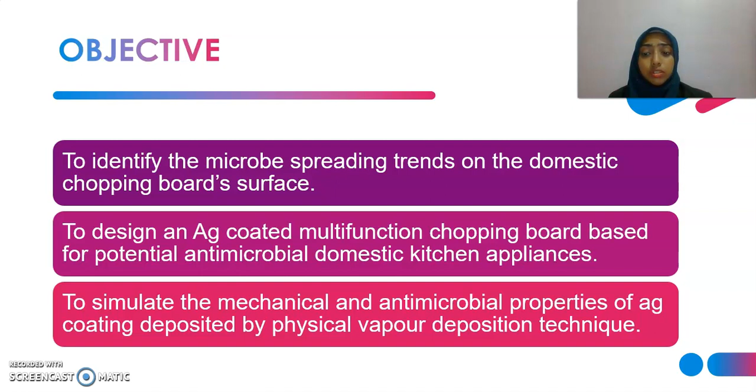Now we move to the objectives. First is to identify the microbe spreading trends on the domestic chopping board surface. Second is to design a silver-coated multifunction chopping board based on potential antimicrobial domestic kitchen appliances. And the last is to simulate the mechanical and antimicrobial properties of silver coating deposition by the physical vapor deposition technique.

This is the plan phase for my project. First is the literature review. Second is the identification of consumer needs, which includes benchmarking, product specification, concept generation, technical drawing, bill of material, and design optimization. Third is the chopping board development and nano silver coating. Fourth is the testing of effectiveness.

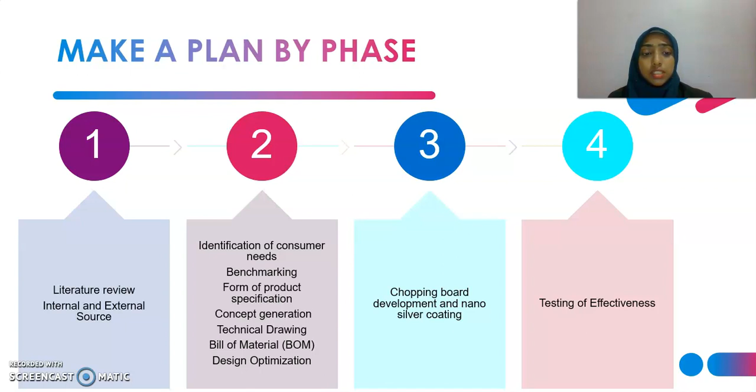Now we continue with usefulness and application. First, a new antibacterial surface for the chopping board was studied because nano silver coating is widely used in the medical field. Second, it stops microbial spreading on the chopping board with the use of nano silver coating. Third, it maintains food hygiene with the application of an antibacterial layer.

Fourth, the silver coating is used not only for antibacterial properties but also comes with long life coating due to its mechanical properties. Fifth, it reduces the use of kitchen appliances such as knife sharpeners and the placement of chopped food such as plates. Then used in domestic kitchen areas. And the last is the customer segmentation, which is housewives and daily domestic users.

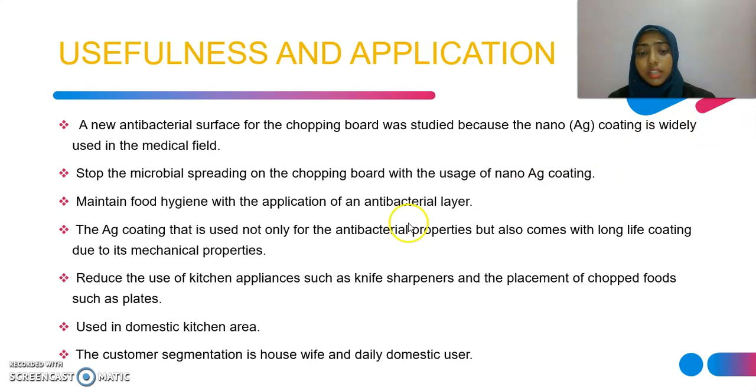Now we proceed to the novelty and inventiveness. Using a bamboo scrimber as the base of the chopping board is well known for its durability. It has a storage compartment that makes the chopping board user friendly. The silver coated chopping board can resist bacterial spreading. It has a drainage tray to stop or avoid microbial spreading in any circumstance.

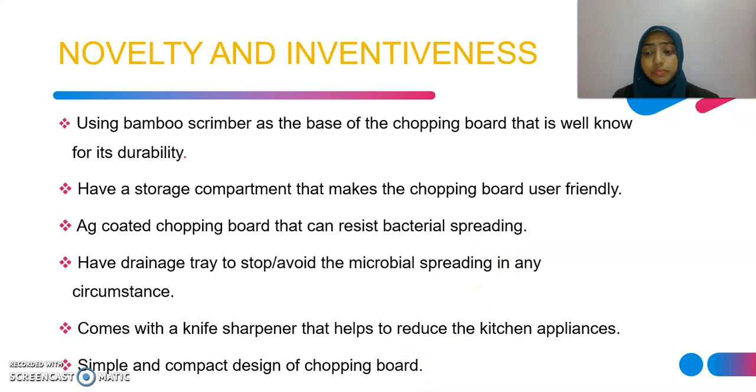It comes with a knife sharpener that helps reduce the number of kitchen appliances needed. It's a simple and compact design chopping board, portable and easy to use.

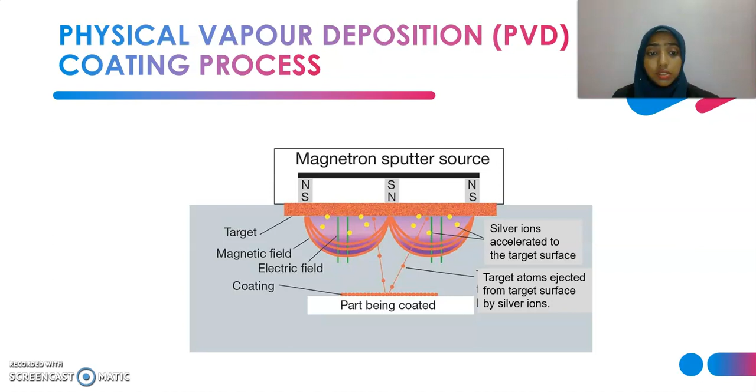Now we proceed to the physical vapor deposition, PVD, coating process. As we can see, the silver ion accelerates to the target surface. Then the target atom is ejected from the target surface by the silver ion, and the ion becomes the coating layer of the part that's been coated. In my project, the part that's been coated is the stainless steel metal.

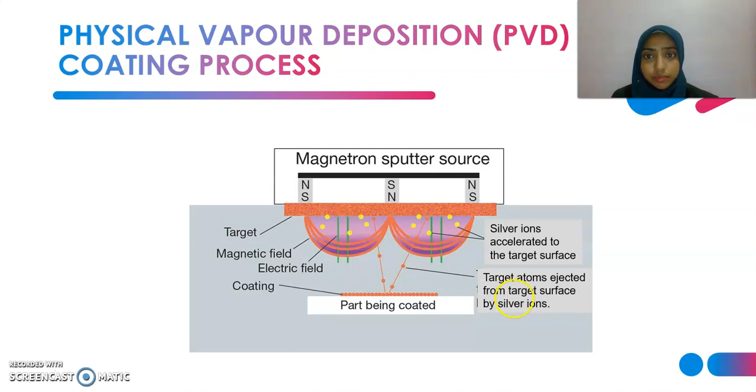This is the antibacterial result. First, as we can see, is the silver coating. Then is the silver cumulative between the water and the medium that is used. And then the antimicrobial activities.

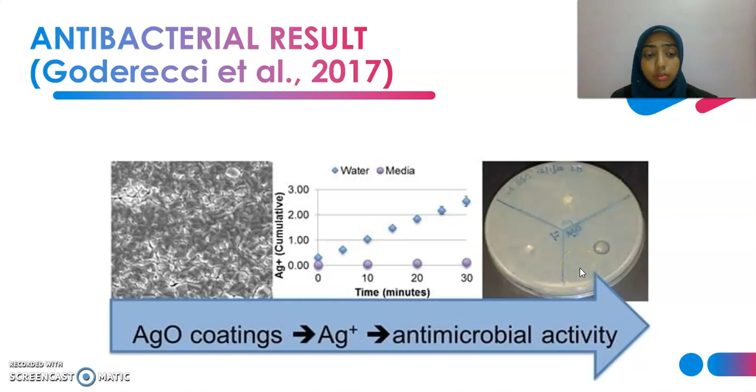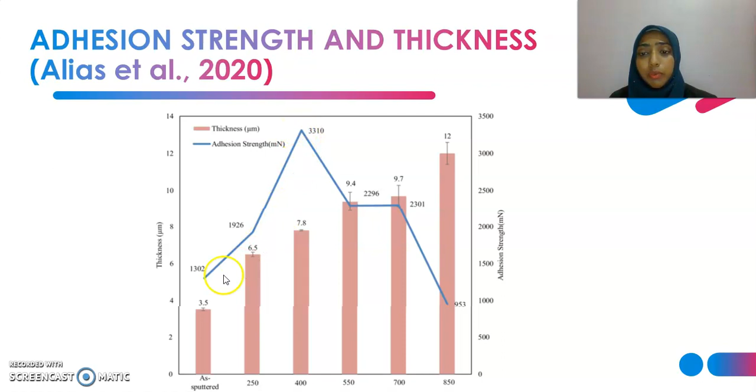Now we proceed with the idea generation. For this project, I have generated three ideas: ideation A, ideation B, and ideation C. As we went through the screening and scoring process and considered the customer needs, it came up that ideation C is the best solution and best design to be used in this project.

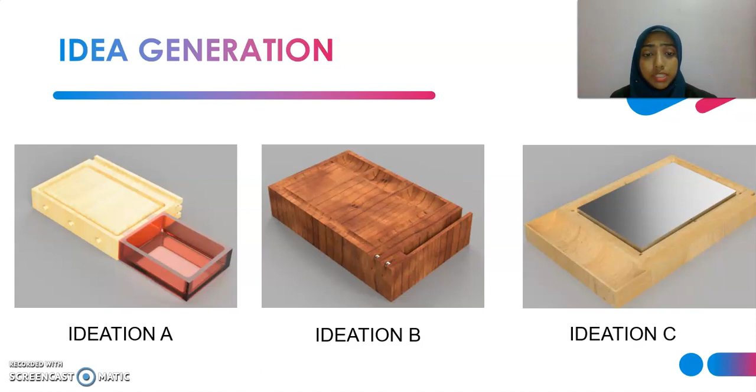The overview of the selected ideation: as we can see here, there is a fluid flow tray, fluid flow channel, storage box, knife sharpener, and stainless steel. The stainless steel is the material used as a layer on the chopping board, and the antibacterial layer is coated on the surface of the stainless steel.

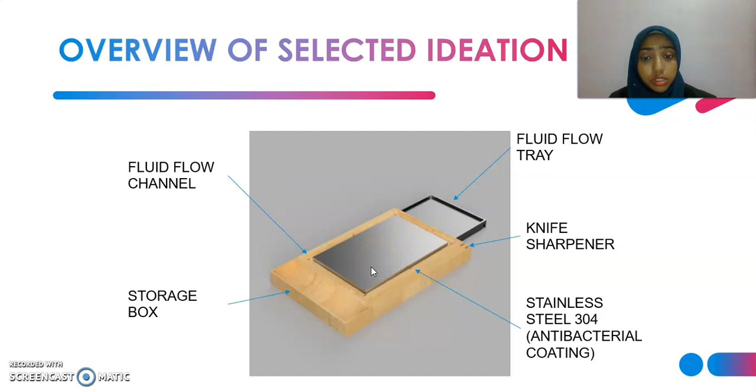For the fluid flow channel, when we cut raw material on the surface, the fluid produced will be channeled to the fluid flow channel and will stay at the fluid flow tray. So the user just has to take out the tray and wash it, which helps avoid microbial spreading on the chopping board. This chopping board is also user friendly because it comes with a storage box.

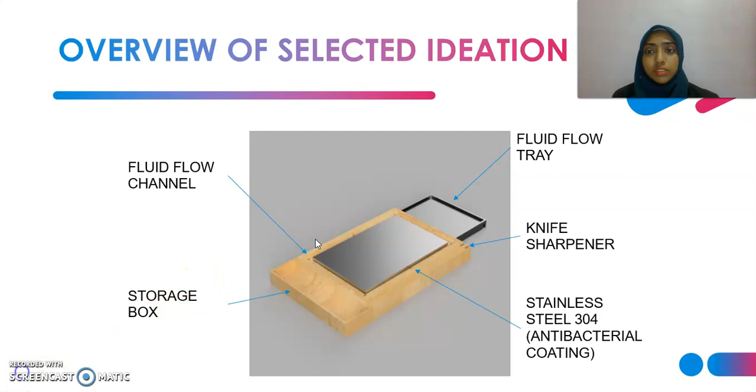Now we proceed with the selected ideation. As we can see here, this is the front view, top view, and isometric view of the selected ideation.

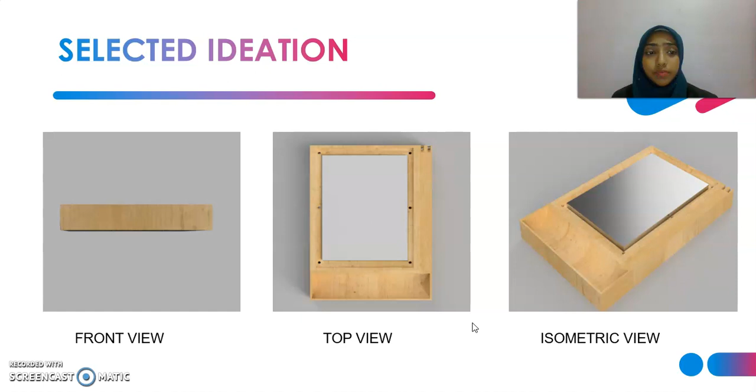This is the product simulation for the chopping board. We start with the safety factor simulation. The maximum load that we can use is 15 Newton, and the displacement is shown here.

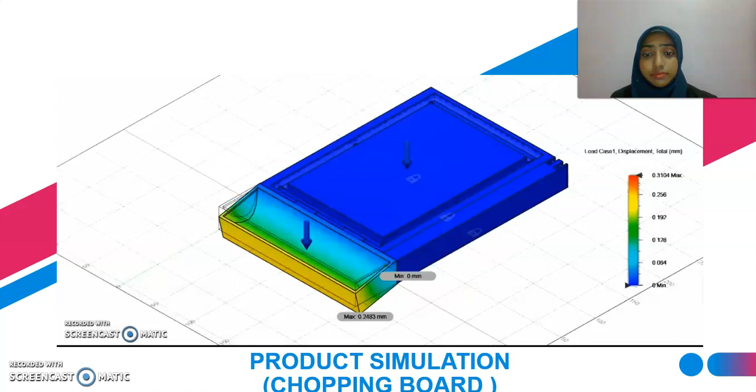Now is the stress simulation. This is for the strain. And this is the reaction force. And lastly, this is the contact pressure simulation.

Now we proceed with the product simulation for the antibacterial sheet. First comes the 10 millimeter thickness, second the 5 millimeter thickness, and the last is the 3 millimeter thickness.

First for the safety factor, second for the stress, third for the strain, next for the displacement, and lastly for the reaction force.

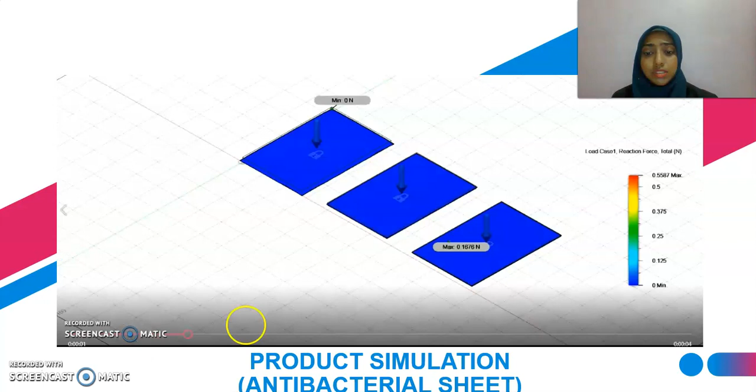Even though the result of the safety factor shows that the 10 millimeter thickness is not safe enough, when we come to application in the chopping board, the 10 millimeter is very good because it can protect the bamboo scramble surface from falling apart or being destroyed.

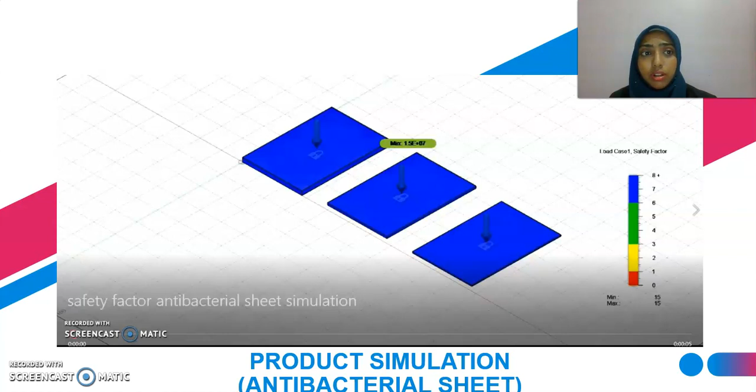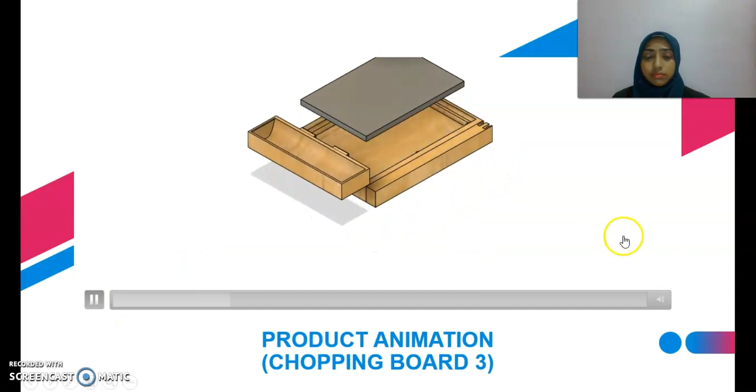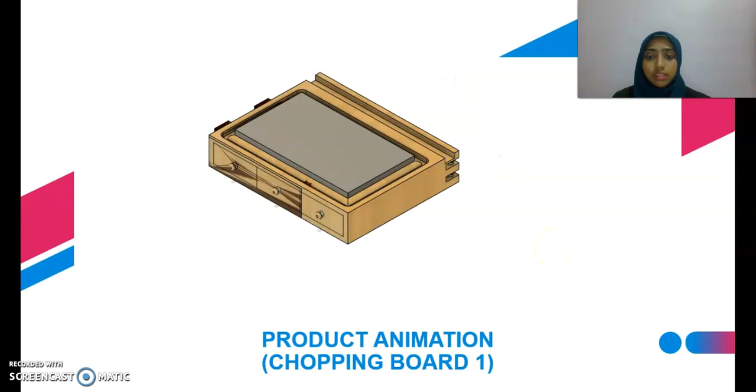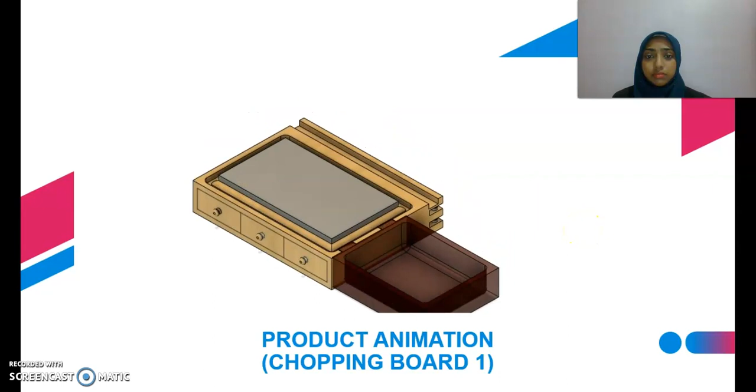Now we proceed with the product animation for chopping board 3. Then the product animation for chopping board 1. And lastly, the product animation for chopping board 2.

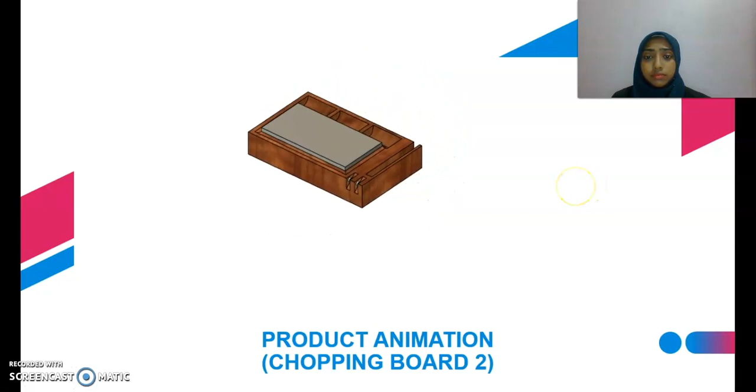The commercialization and potential: the target user for this chopping board is housewives and people who want to have a healthy lifestyle, and its benefit is that it can be used by all ages and genders. As we know, chopping boards are used daily as kitchen appliances, and it is very necessary in our life.